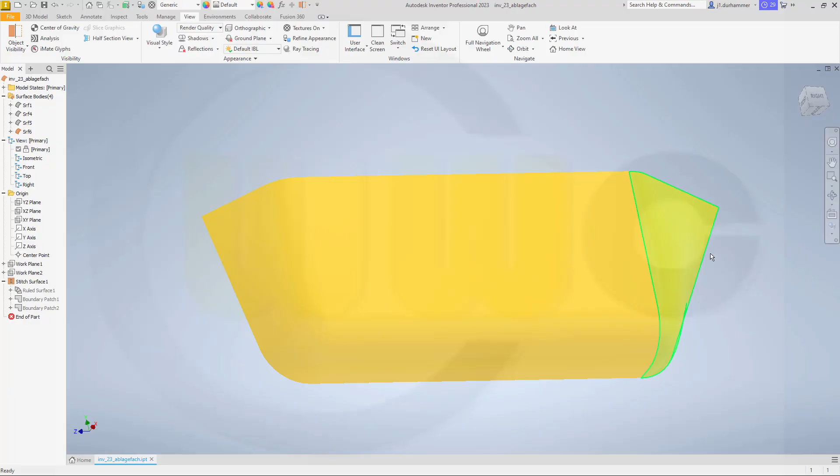Hi, welcome to an Inventor 2023 video tutorial. It's the storage compartment, and it's a nice little exercise for 3D sketches. Of course, you could do it with 2D sketches only as well.

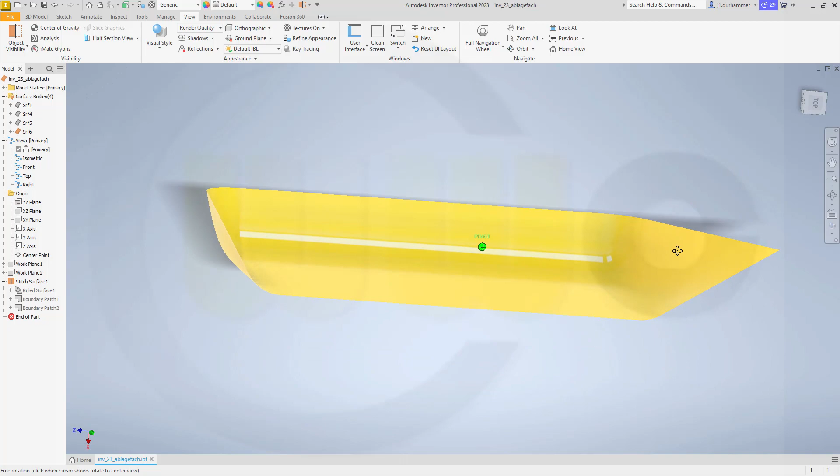So let's have a look at the drawing. Here is the drawing. You could make a screenshot and then follow the exercise step by step if you want. So let's have fun with Inventor.

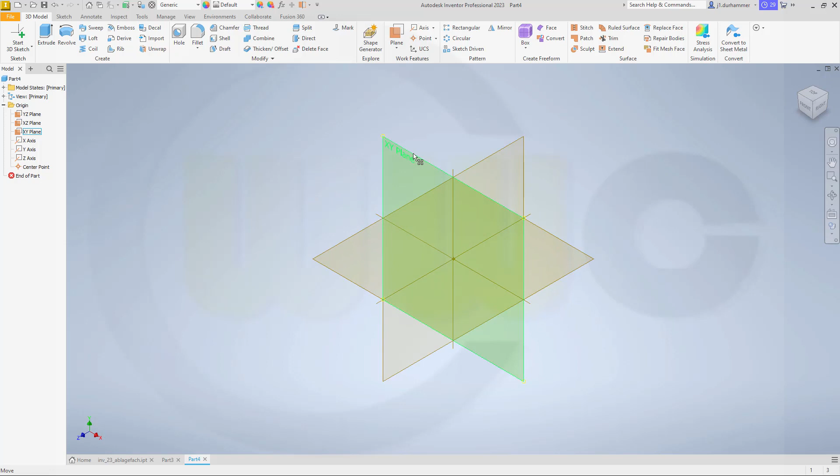Okay, first I want to create two reference planes. Make those elements visible. I need an offset plane to this one, and the distance should be 470 millimeters. Then another one with an offset to this plane here, and that one should be 240.

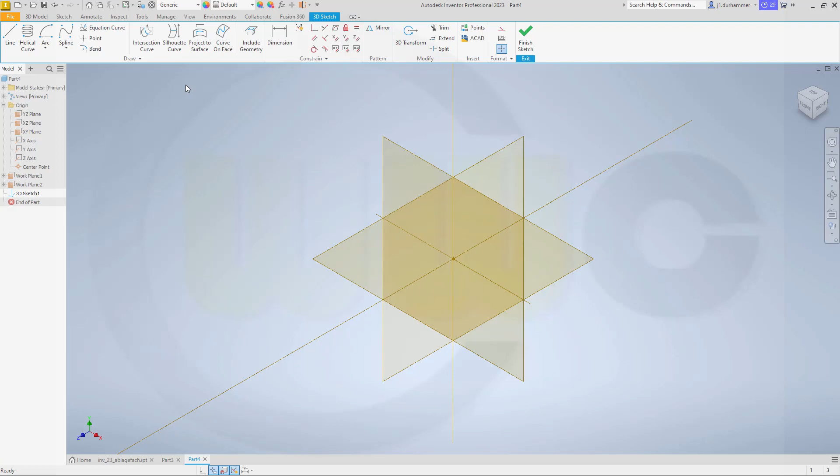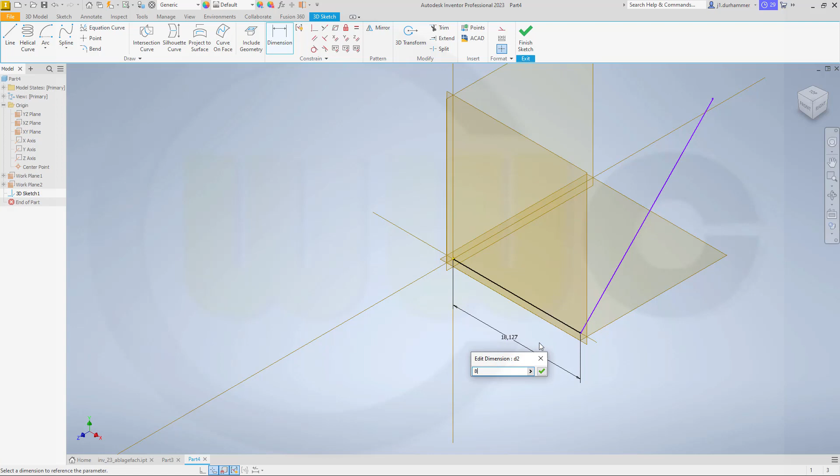Now we can do our first 3D sketch. I need a line. Let's activate that ortho mode from the origin in that direction. Then deactivate this, and I need a line which goes up somehow. Let's add a dimension here. This should be 80. That line should be in the XY plane.

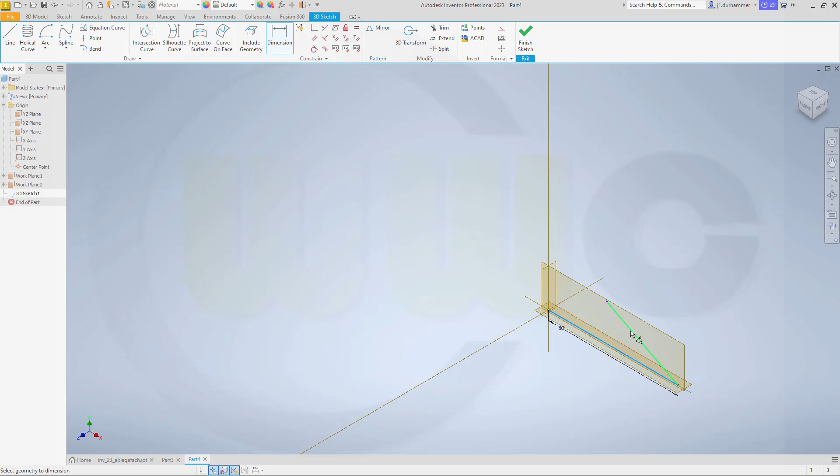Okay, now move this. I need an angle between this line and that, and that angle should be 95 degrees. And of course, that line should go up to that reference plane, to this one. Great.

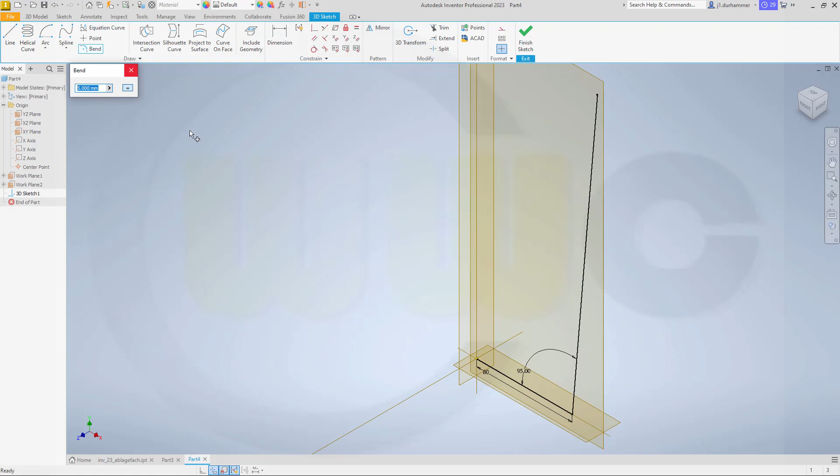Now I can add a bend, and that should be 6 millimeters. And that bend should be between this line and that line. This seems to be fully constrained, so let's finish that sketch.

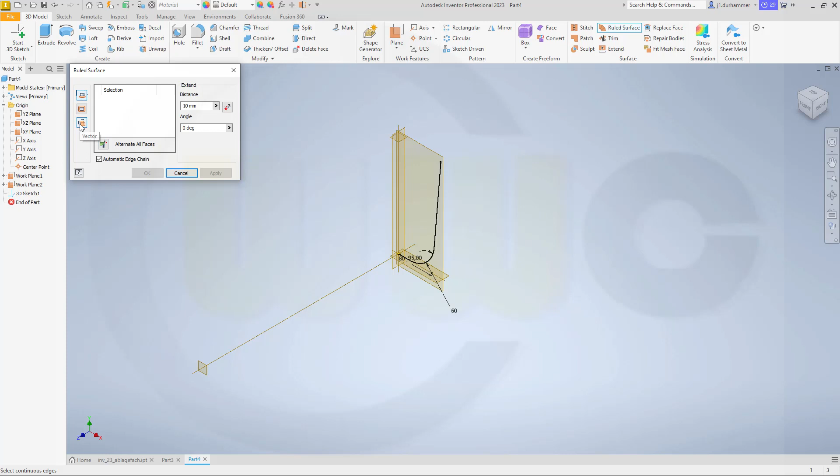Now I can't do an extrude because Inventor can only extrude 2D sketches, but I can use a ruled surface. So let's go for a ruled surface. Select the vector option, then select the profile. The vector should be this axis or that plane, so let's go for that axis.

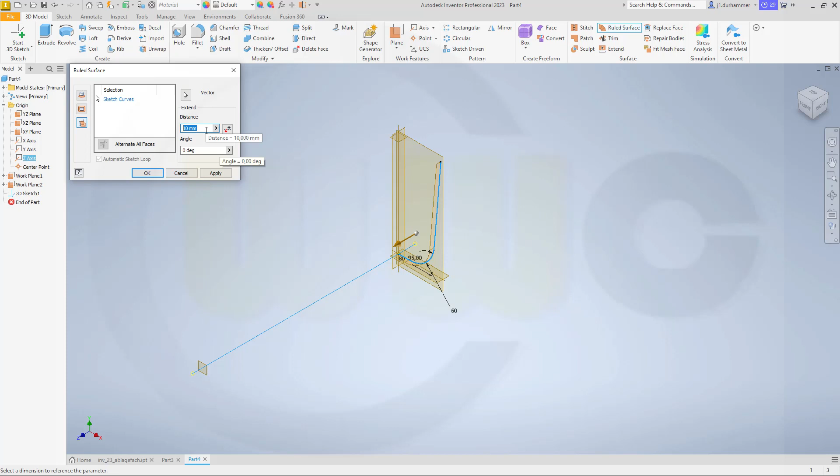That's the Z axis, and the length should be—there's an option to make it up to that plane. Anyway, let's go for 470 millimeters, and make this surface not translucent. Great.

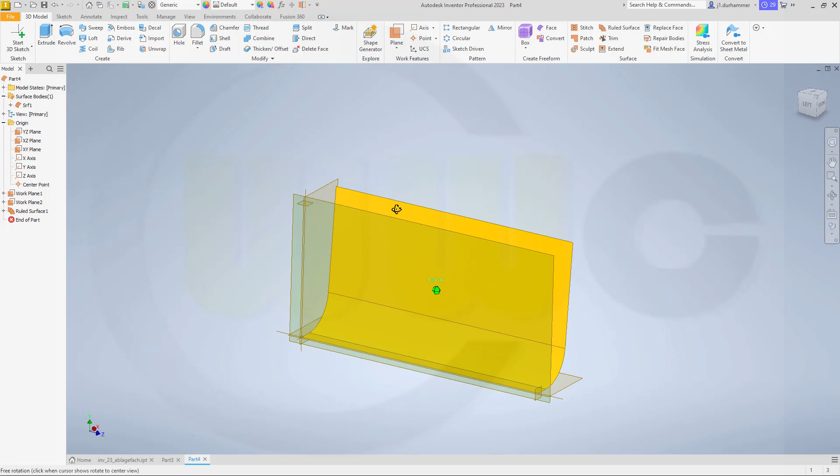Now my next 3D sketch should be over here at that point. So I want to bring in that one here. Go for another 3D sketch. Let's draw a line, activate the ortho mode, go here, and make that line in that direction.

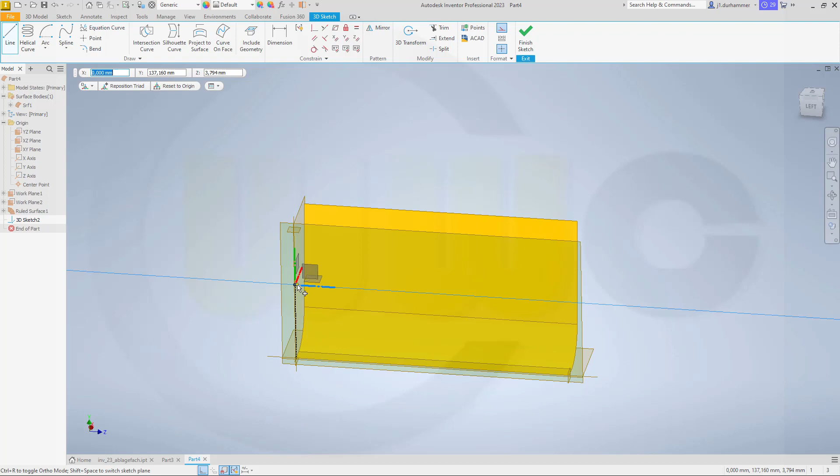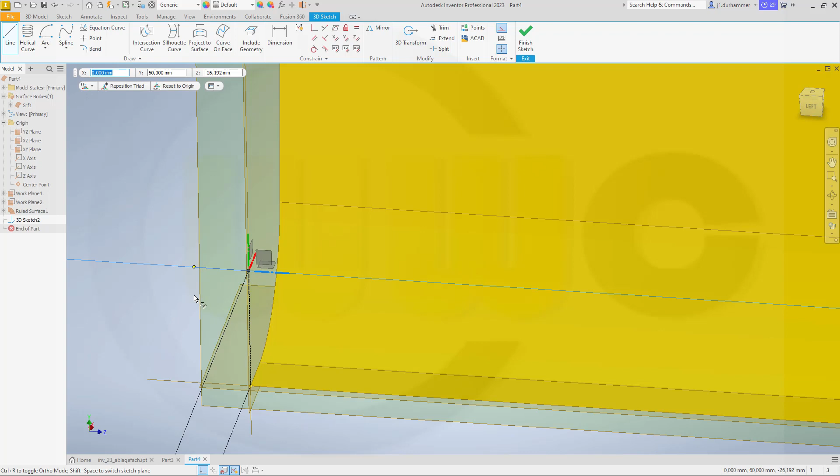Let's give it a dimension, and that dimension should be 60 millimeters. Let's go for an arc, a center point arc—yes, or maybe draw first another line from this point here, without ortho mode, maybe like this.

Put that line into the ZY plane—that would be this one.

Now add a center point arc. Center should be here at the second point, and then go over here. Now make those two points coincident, and this one should not be for construction but a standard one.

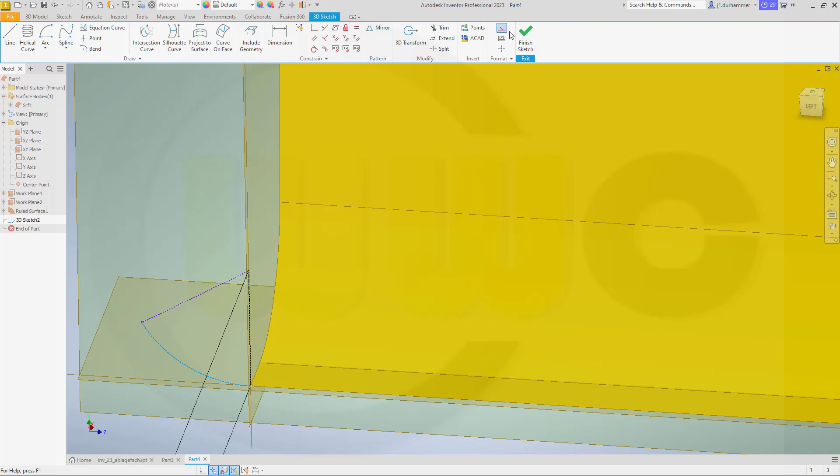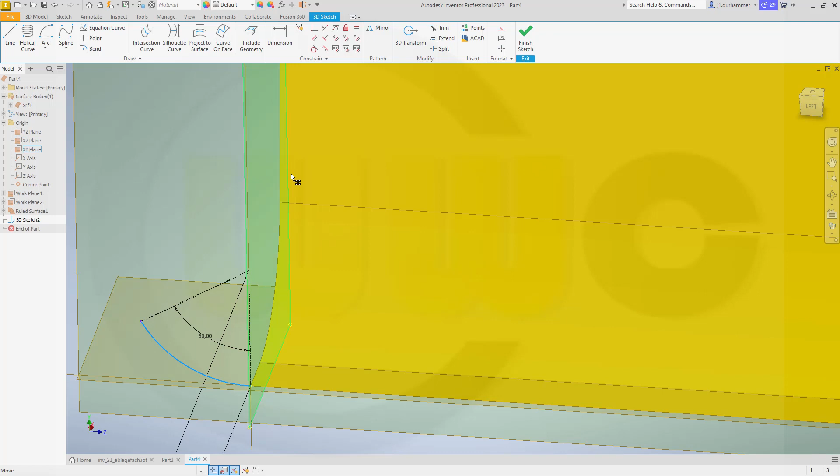Strangely, this is not fully constrained. So that arc should be, of course, in that YZ plane as well—maybe that's missing. No, that's over constrained. So I really don't know. Maybe I need a tangency here, because that one is fully constrained.

This one is fully constrained. And if you try to move it, we could look if there are any degrees of freedom here in a 3D sketch, but there are no degrees of freedom here. So let's leave it like it is.

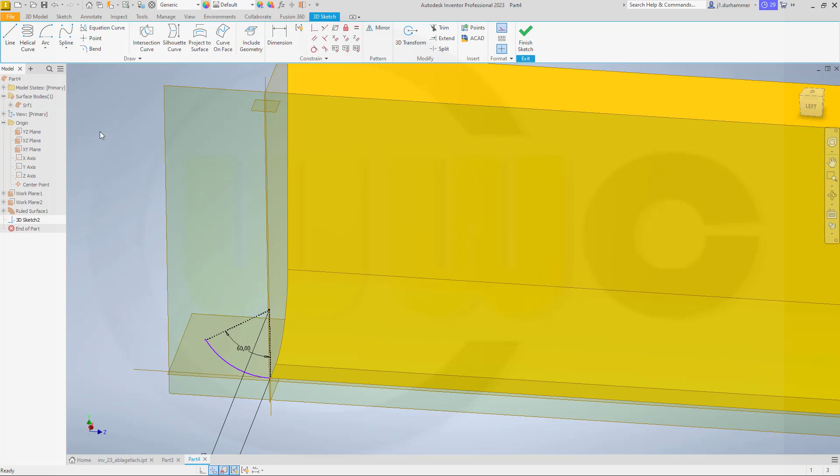I want to use a line which starts at that point and goes up. And again, that line is not for construction, and that line should be inside or parallel to the ZY or YZ plane, this one here. Great, this point should be coincident to that plane.

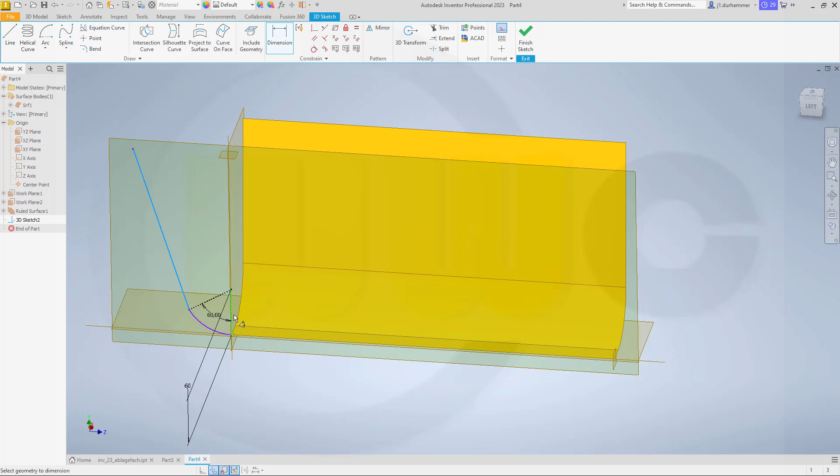And I need a tangency, or an angle—let's go for an angle. The angle between this line and that line should be 30 degrees. Still, it's not fully constrained, but I don't care at the moment, at least. So finish this 3D sketch.

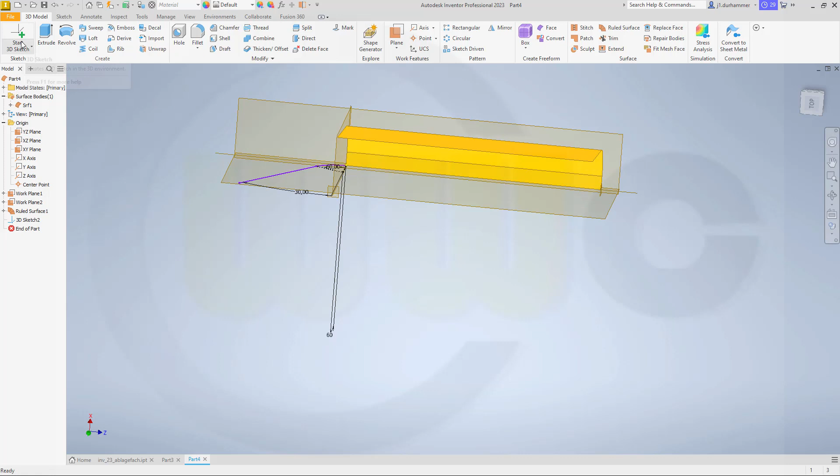Next sketch would be somewhere up here, so I want to bring in that one here. Go for another 3D sketch. Go for include geometry, and I want to include this line, so I've got that point.

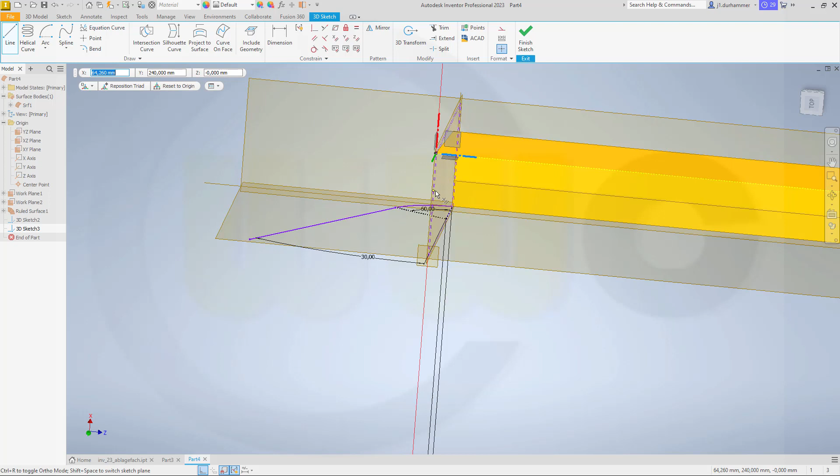Again, I will draw a line, which is just convenient here in that direction. Let's add a dimension; that dimension should be 50 millimeters. Still, it's not fully constrained.

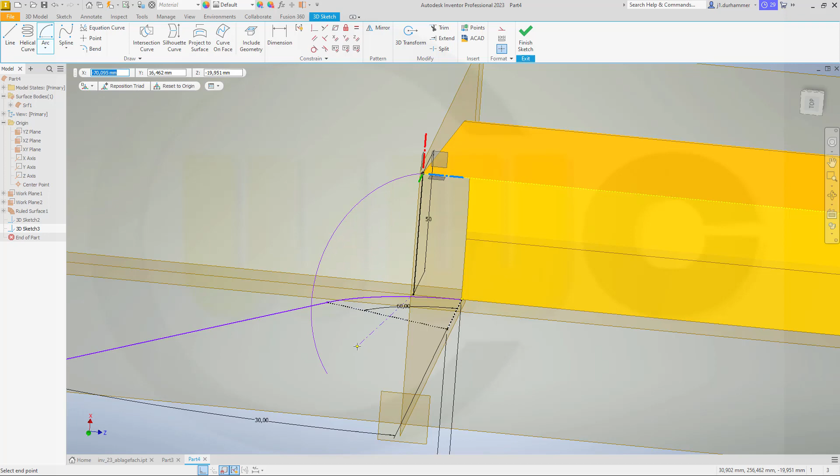It's kind of odd. Now I want to go for a center point arc. So that's the center, there's the first one, and then it should go something like this. And of course, this should be inside the ZX plane. So this should be inside the ZX plane.

Okay, then I need to bring in that point, so go for include geometry and bring in that point here. Then let's make a line from this point here to that arc. Of course, this line should be in that plane—it's already there, that's okay.

And then I need a tangency constraint between this line and that arc, and now I should be able to trim it. Nope. So let's undo that.

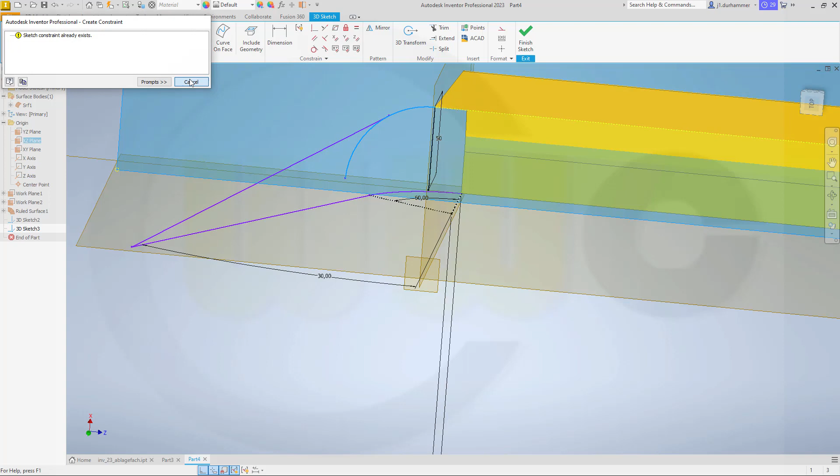Maybe, just maybe, this arc is not in the correct plane, but I think it is, but we can check. Yes, it is. So it should be possible to trim. Now it is possible. Okay, finish that sketch.

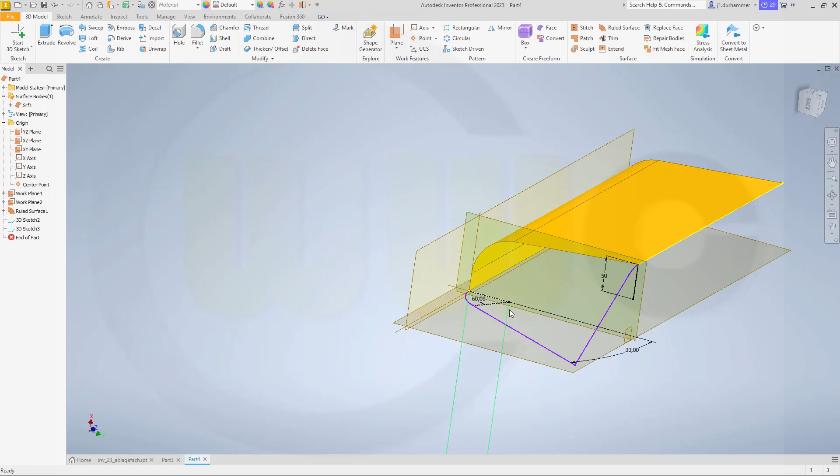Now if I want to use a lofted surface, this will not work, so I will go for a fill surface instead. Maybe hide those planes.

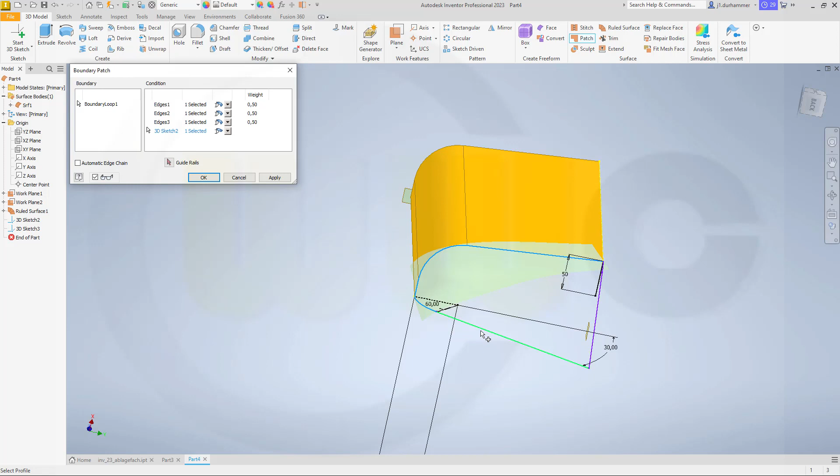And go for a patch, which is a fill surface. Let's select this edge, that edge, and this one. And those should be tangent to the surface, like this. Then add this arc, that line, this arc, and that line.

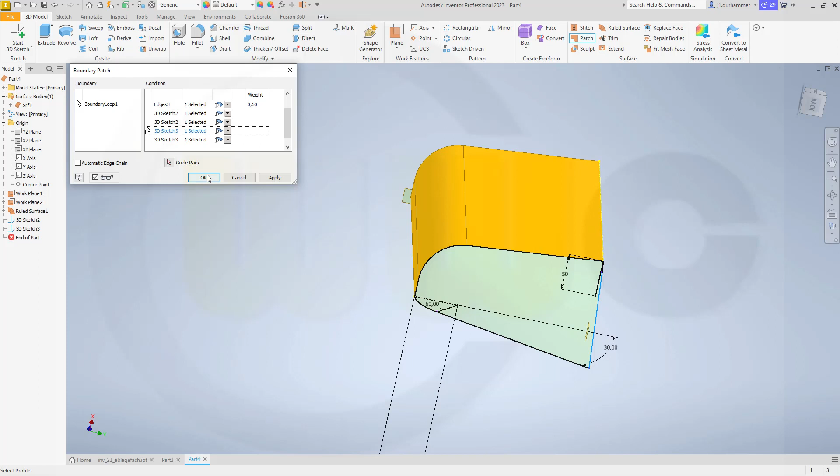Let's check it. That's okay. No, it switched. No, that's wrong. Sorry, it should be 3, but all those edges are together up here, so that should be okay. Confirm. And make this one not translucent. Looks good. So let's move over here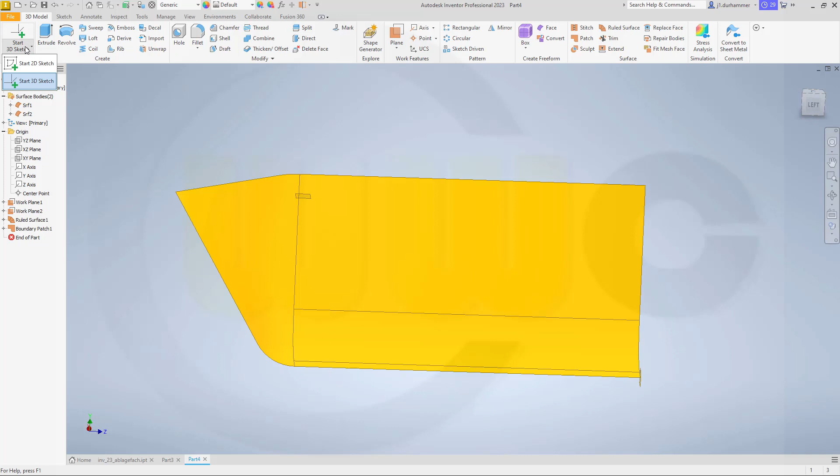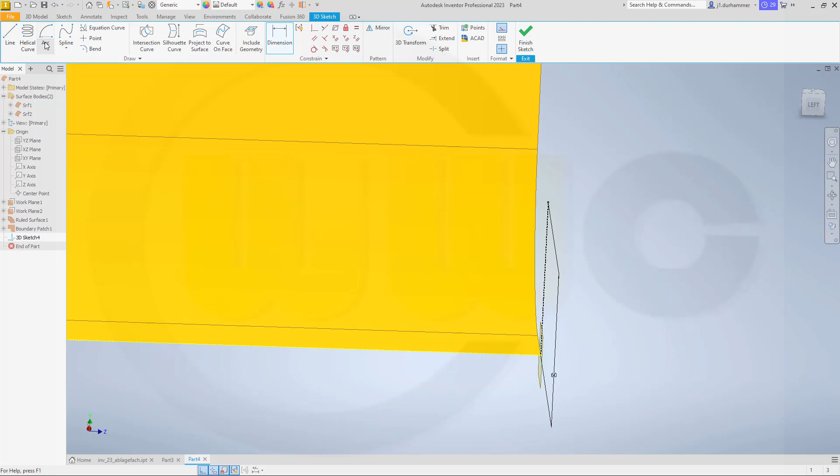and do another 3D sketch. So start 3D sketch. I want to bring in that edge, and I will draw a line, construction line, from this point up, and the length should be 60. Okay, now let's go for a 3-point arc. This will be the center point. That will determine our radius, and like that. Make this not for construction.

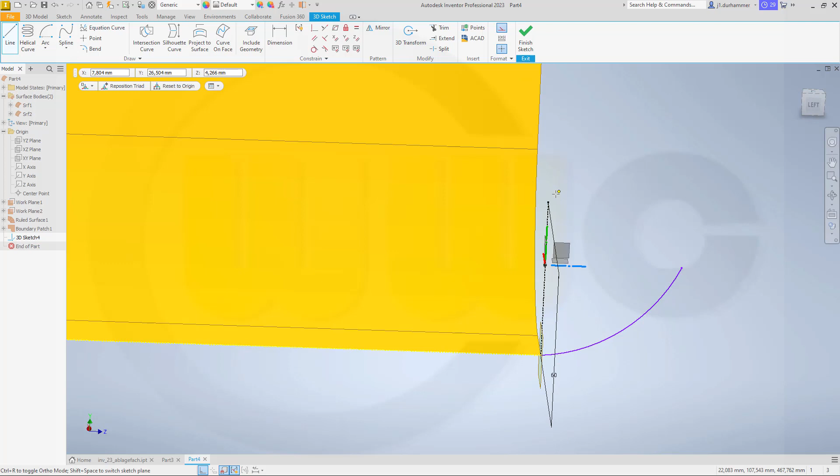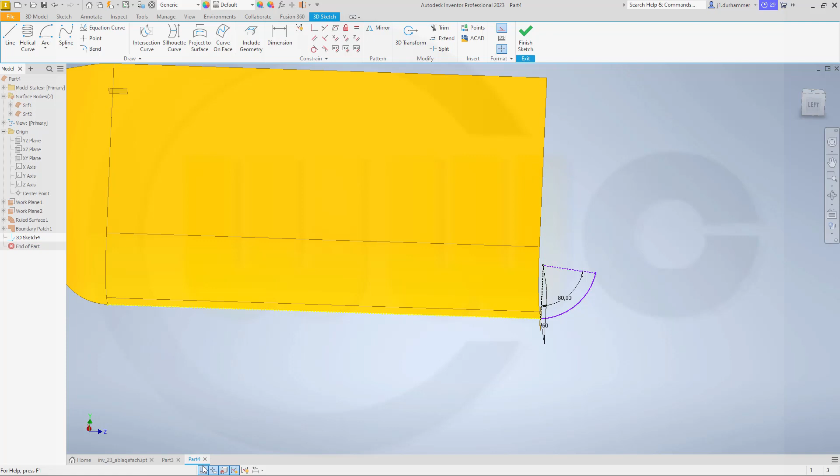I will need a construction line from this point to that point, then add an angle, and that angle should be 80 degrees. Okay, now I need a line from that endpoint here up there. This should be not for construction, and there should be an angle between that line and this line.

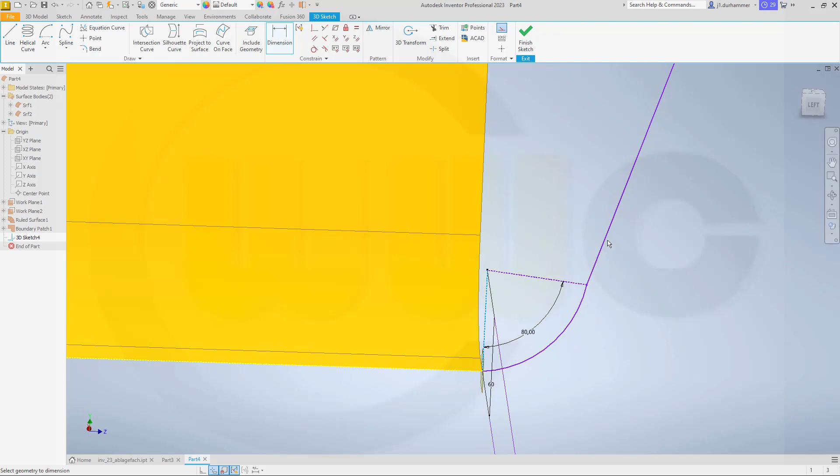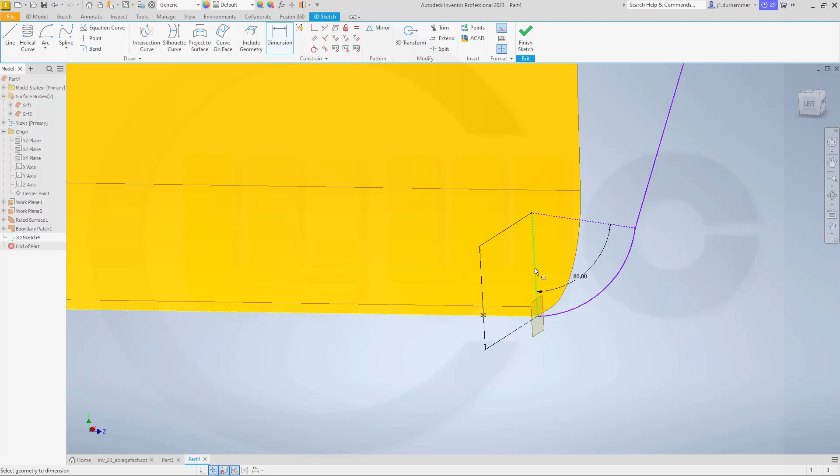Let's see, between this line and that line, so that line is still not in that plane, so it should be in the ZX plane. No, that's wrong. Undo, it's not the ZX plane, but that would be the YZ plane. This one, okay. And now I'm able to do that. No, still wrong. No, that's okay, but that should be in the same plane.

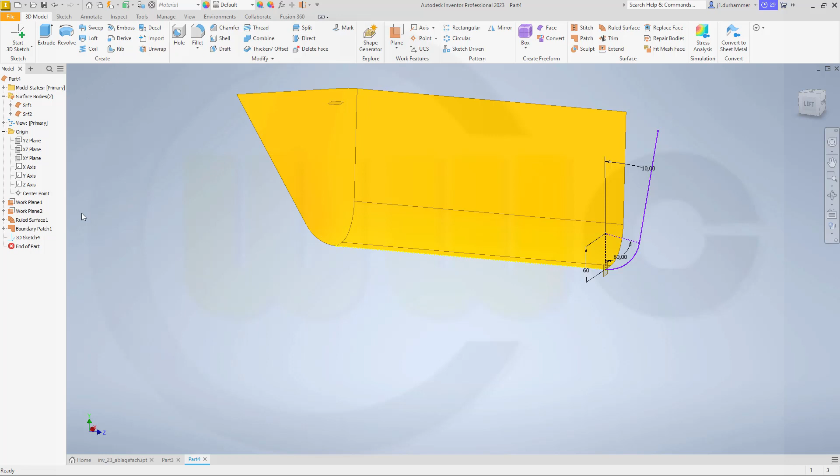And now I should be able to do a dimension. Yes, and that dimension would be 10 degrees. Let's put this point coincident on that plane. Great. Finish this 3D sketch, or maybe, just maybe, add a tangency constraint here, just in case. Let's see. No, it should be tangent. Finish that sketch. Next sketch is up there.

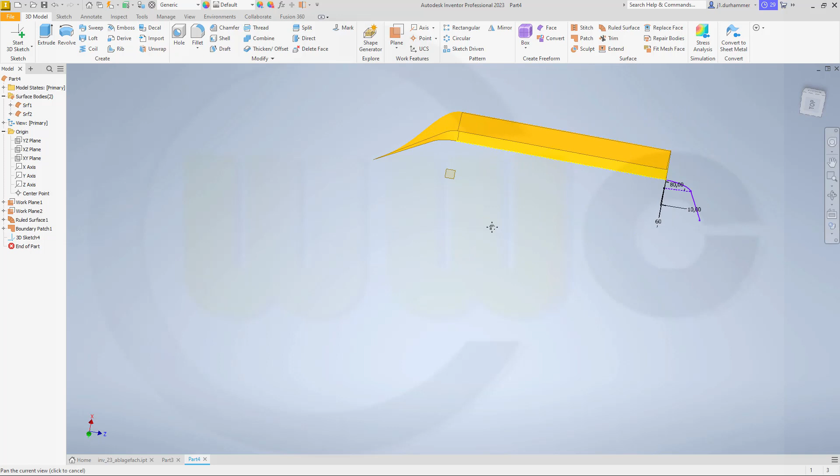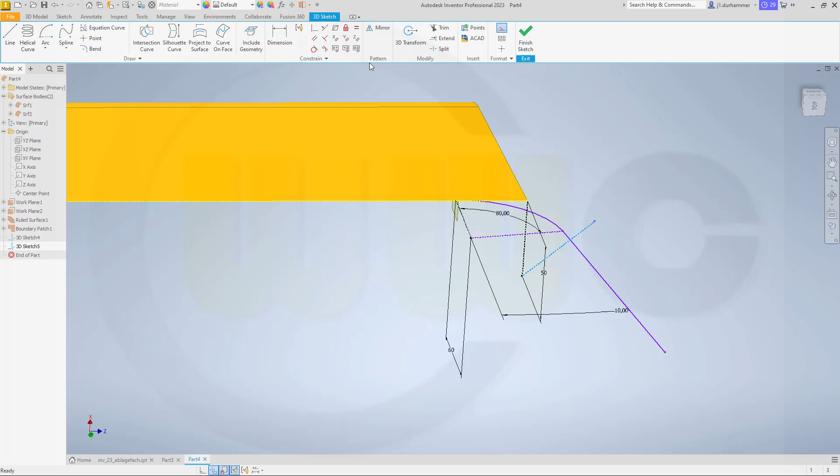So go for another 3D sketch. Bring in this edge. Draw another line from this point. Activate the auto mode in this direction. This should be a construction line, and the length should be again 50. Then we need another construction line from this point here in that direction, so deactivate this like that, and this should be again in, in this case, the XZ plane.

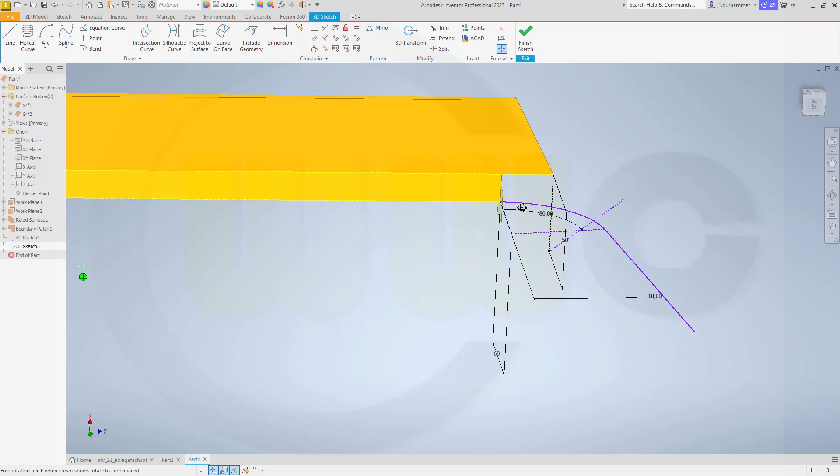Then we can go for that center point arc. That, let me take a look. So this should go from this one to that one. No, I've just got a little bit irritated. No, let's go again for that center point arc, and the center point should be here. And that's sort of the radius, and then it should go over here.

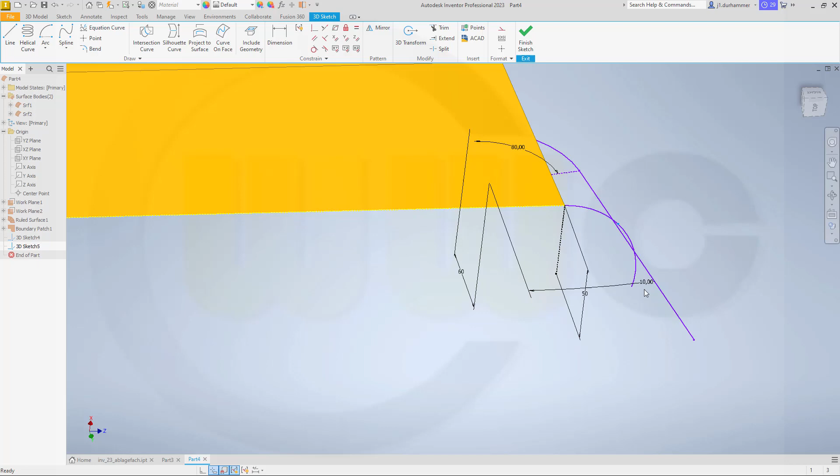So this should be again in the ZX plane. Then those 2 points should be aligned, and then we can add an angle here, which is not necessary, and that's not necessary as well because that's the other. So let's draw it like that. Then bring in that point here again, go for include geometry here, then draw a line from this point onto that arc.

This line should be again in the ZX plane. Nope. That's the ZX plane, yes, so it's already there. Okay, great. Make a tangency constraint between this arc and that line. And let's see if we can trim here. No. So undo and move this back a little bit, and then it will work. Obviously not possible to move it more.

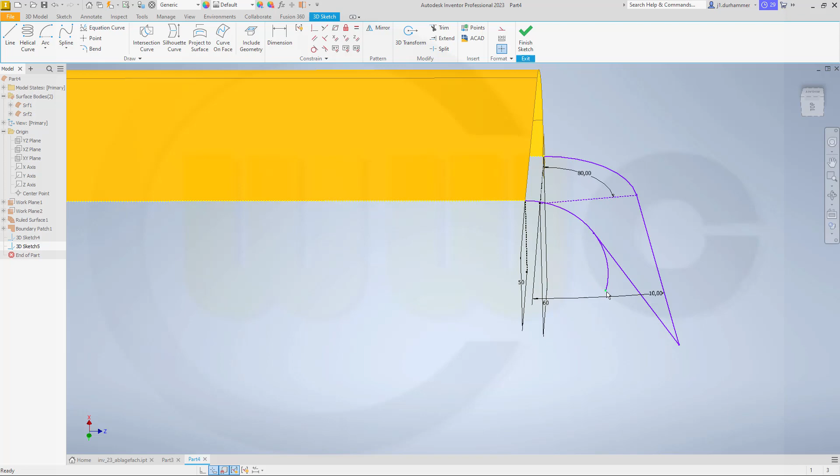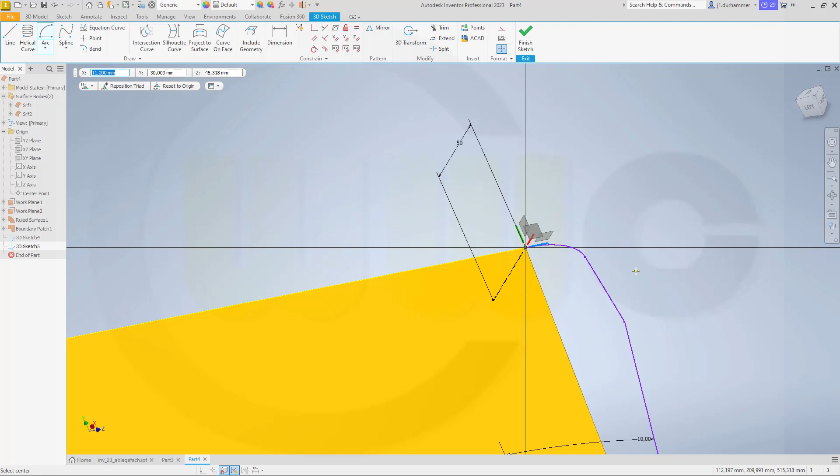No, let's try to trim. Still doesn't work. That's really great. Maybe that arc is not in the right plane, but I think it is. Yes, it is. So I should be able to trim it. But that's kind of odd. Okay, I could remove this and draw a new circle. Same center point, start point, and then go to that endpoint. Bring this into the ZX plane. Then add a tangency constraint here, like that. And we should be good.

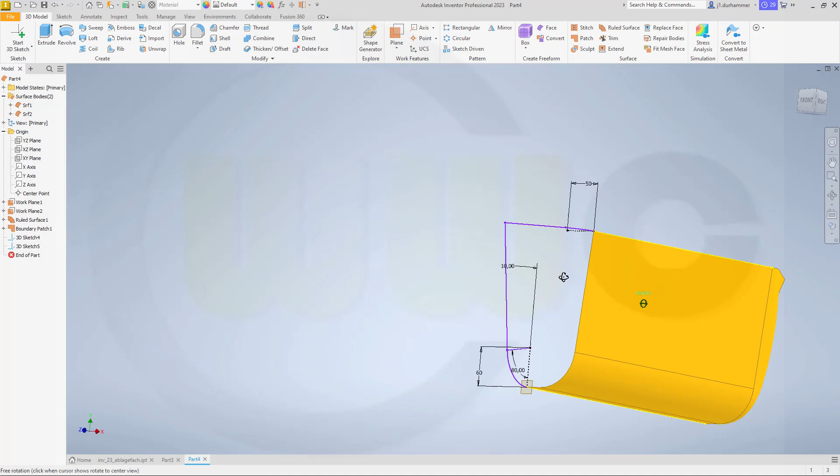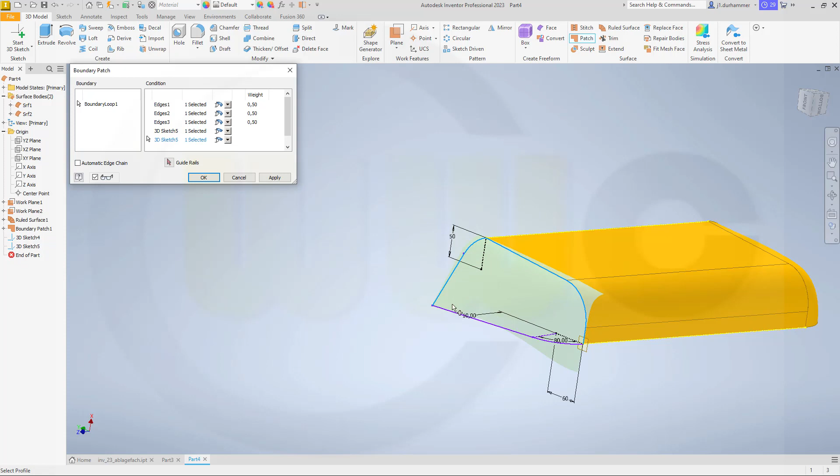Finish the sketch. Now another fill surface, so go for that patch, select the edge, this edge, that edge, make them tangent. You could do this afterwards as well, of course. Then add this arc, that line, this line, that arc, and confirm. Make it not translucent. Now we can stitch those together.

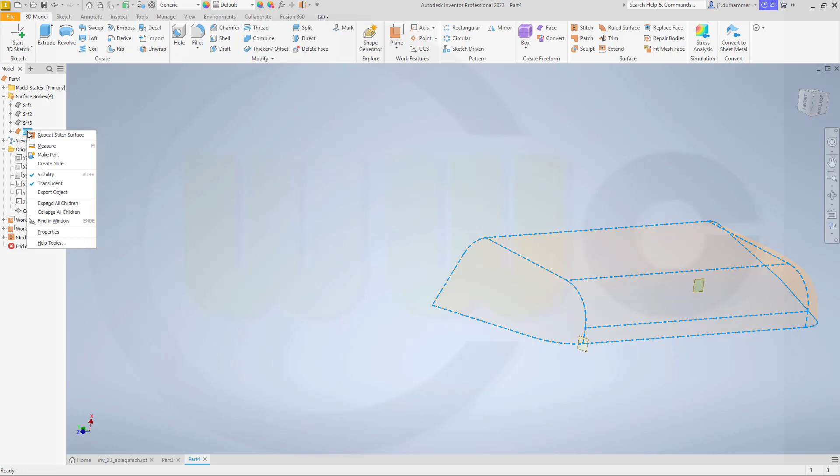So this one, and that one, apply, and done. And again, make it not translucent. And I'm done. So I hope this was helpful.